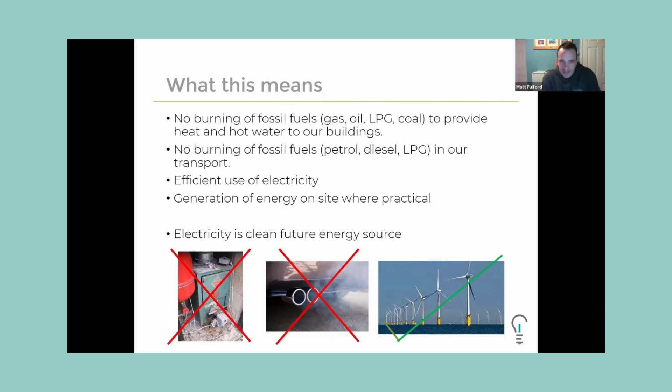So that's really what it means in your churches. I'd suggest you just have a quick breakout now, for no more than 5 minutes, on how this is likely to affect your church, and what's preventing you from not burning anything in a church? What's preventing you from achieving net zero? Because I'm really interested in hearing what you think might be the barriers.

So if it's possible, I don't know quite who I'm looking at, to drop back into those breakout rooms and discuss that for 5 minutes, that would be fantastic. Yeah, you're looking.

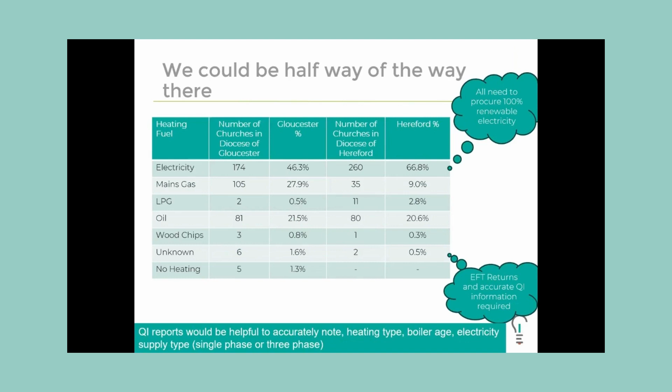So certainly there was a good discussion in the group that I was in around some of those barriers, in terms of sense of urgency, and people feeling bogged down by lots of things, which means that they're not taking action. And one thing I often see churches stuck in is going, well, look, this is just impossible. We can't do this. We're a grade 1 listed building. It's not for us, thanks. Maybe for new build homes, but for us, this is just too difficult.

So I really wanted to use this to try and bust some of that a little bit, and give a bit of hope and positivity. The first thing to say is that in terms of not burning fossil fuels, I think the church is already 50% of the way there. My evidence for that is studying all of the churches within 2 dioceses: Gloucester, no surprise, that's mine, and Hereford, which is often put out to be the most average diocese in the Church of England. Whether that's true or not, that's the claim they make.

So we've looked at all of those churches and how they are currently heated. Within Gloucester, just under 50% of churches are already heated by electricity. In Hereford, 2/3 are already heated by electricity. So they're already not burning anything. They're already using electrical solutions to heat their churches. And quite frankly, most of those churches have been using that for decades.

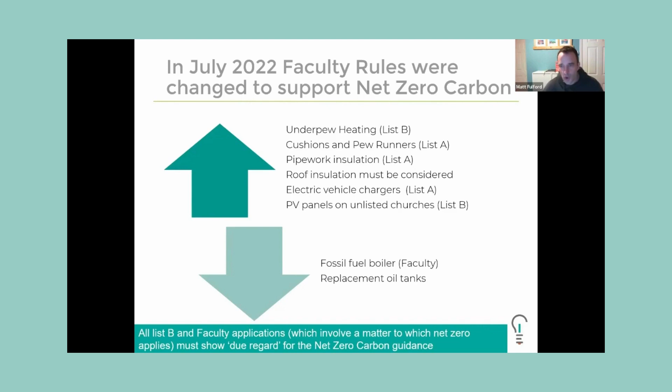So in terms of some of the answers maybe you did come up with in that breakout session, what this really means for churches is the replacement of gas and oil boilers is now very actively discouraged, and is only going to be permitted where no other options are available. It's not banned, but you've got to prove that you really can't do anything else.

Forms of electric heating, and we'll come on to lots of those in the case studies I've got, are going to need to be the future, but they're already with us. 50% of churches, as I say, are already there. And the faculty process for under pew heating has got easier to gain permission for.

So some of the challenges, I think, are firstly planning what to do before the boiler fails. A lot of churches I go to advise go, help, my boiler's broken down, what do I do? It's a bit late to ask that question once your boiler has failed. You need to be answering that before it's failed. So I often go around slightly scaring church wardens, apologies, and going, if your boiler is over 15 years old, expect that boiler to break down within the year.

I'm not saying it will, but if you expect it to do so, then you make the right plans around that. If your boiler is over 20 years old, expect it to fail next week. Now, if you go in with that mindset, that often creates some of this urgency of going, my boiler's 30 years old. Well, you're doing really well then, but it's not going to last you very much longer. It's probably going to fail next week. You might get a bit longer out of it. Who knows? But if you're expecting that, then that's what's happened.

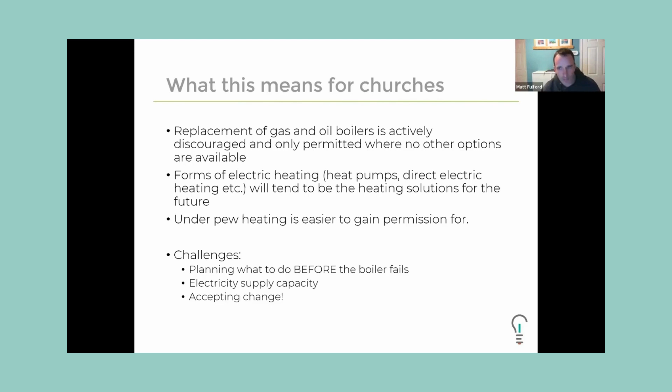Electricity supply, I saw that on some of the questions on the chat earlier. And can we get enough capacity in our building to do that? And I think the biggest challenge actually is accepting that there's a change. We need to do something different. Just because you've got a metal box somewhere down in a basement that provides heat doesn't mean that's the right way to carry on doing it going forward. So we need to accept that change.

Lots of technologies out there to do this, mainly heat pumps in lots of different forms. And I'm not going to go into a technical talk now on all the different forms of heat pumps, but just to say that my wife will lay testimony to the fact that I scream at the TV when the media mention heat pump as a single entity. It's not, it's many, many different things.

It's a bit like saying that all forms of transport are the same. And we know if we want to get from A to B, we can cycle, walk, get the train, the bus, fly in a helicopter, whatever. They've all got different attributes to them. It's the same with heat pumps. We have many, many different sorts, and we just need to choose the right one for the right place. Lots of forms of direct electric heating are also very valid in churches.

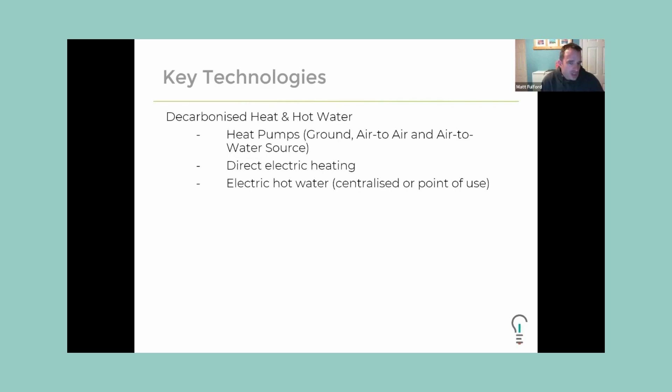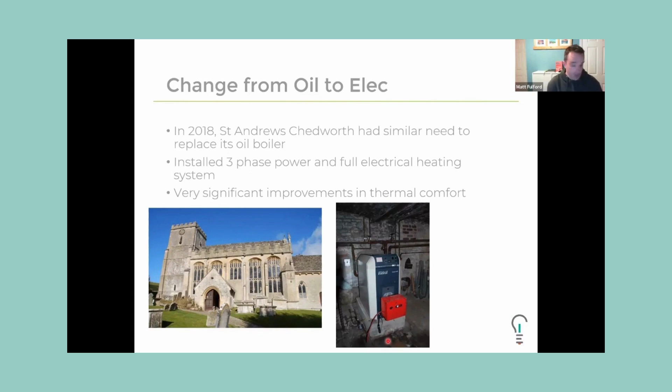Had to do something. So this church went ahead and installed a new 3-phase electricity connection, so it did increase its electricity capacity, and put in full electric heating, and had incredibly significant improvements in the quality of the heat within that space. So it went from being a church where you knew which pew you had to sit in if you wanted to be warm, we've all experienced those churches, to being a church where you walked in and went, oh, isn't this a nice, warm, welcoming space? Quite a fundamental change.

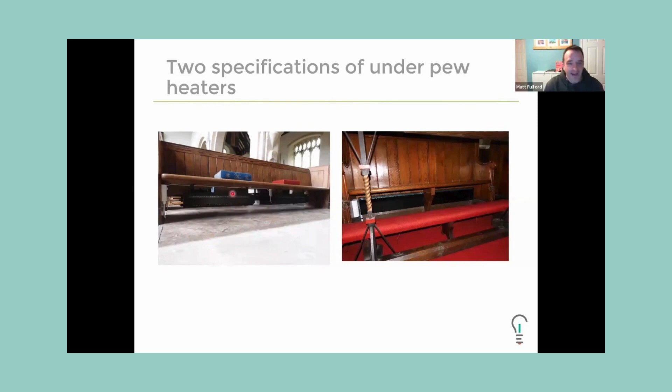It installed under pew heaters. These are two types. Look, it's my church. I installed two types of heaters because I wanted to be able to show people different types of heaters. Okay, so we've got one type underneath the pews, and another type up underneath the choir stalls. So you can see I've had to lie on the floor to take this photograph. When you walk in the church, you barely notice they're there, but you can see them in there. So that's what they've done moving forward.

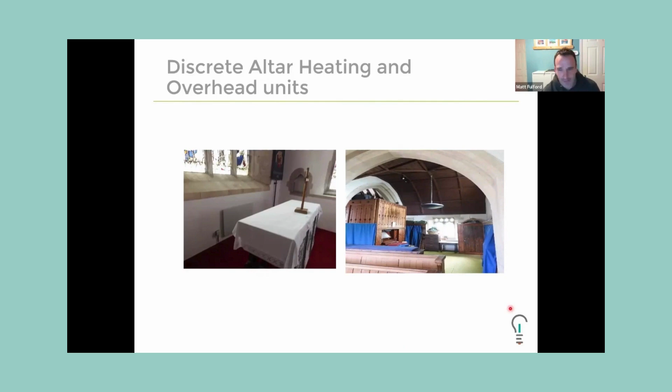It allowed the oil tank to be removed, so that's where the oil tank was. You can see it in position there, not looking particularly attractive against the Grade 1 listed building, and now it's gone.

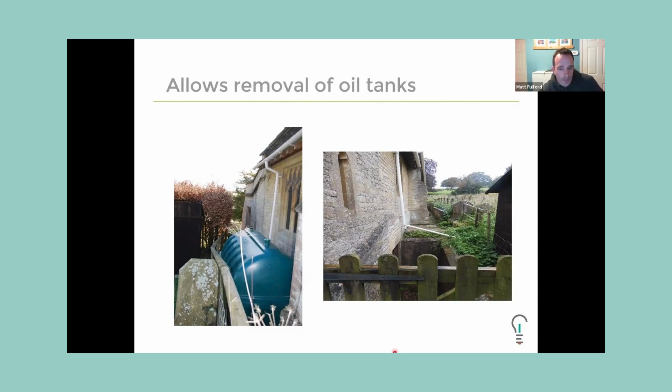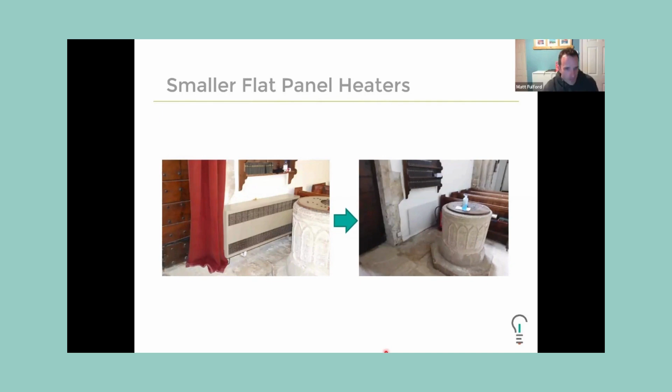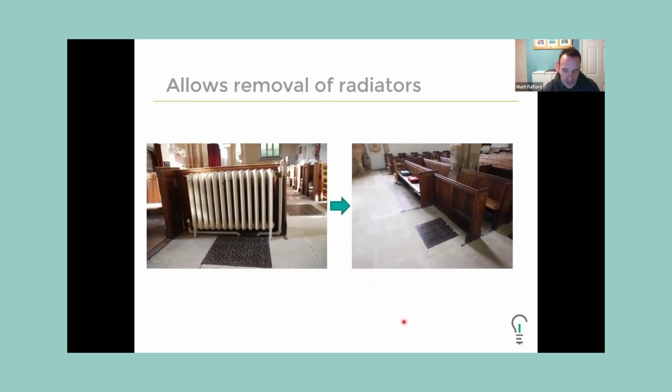It also allowed for - when we had big fan convectors that rattled and made noise and blew some warm air, if you were lucky, they've been taken out. In this case we replaced it with one very slim flat panel heater. You can see the architecture better, we can get around the font with more room, and it's now absolutely quiet. So there are improvements there. Other big radiators, big cast iron radiators, have now gone, so we're bringing back the ability to see some of the other furniture and features within that building.

Various lessons learnt in there. We found that these BN Thermic under pew heaters, the ones we used in the nave rather than in the choir, provide a bit more distributed heat, so we didn't get people complaining about a line of heat on the back of their legs, which we do with the ones up in the choir. We had a little challenge around the brackets needed to fix them, and we needed to get them a bit shorter, which the manufacturers now make. You really do need to heat the whole length of the pew - don't leave gaps between the heaters. This hit and miss approach some churches have gone with, where you put one heater in those pews and miss a row and then put it in the next pew, that doesn't work. You need to heat the length of every pew you want heated.

With programming, really keep it simple. We put in programmers - it wasn't that complicated - that you could time to turn the heaters on. We worked out you only need to turn them on 15 or 20 minutes beforehand. The easiest way to do that is to have a switch that the church warden turns on immediately after they turn on the light switch when they arrive to prepare for the service. That works best and it's the simplest.

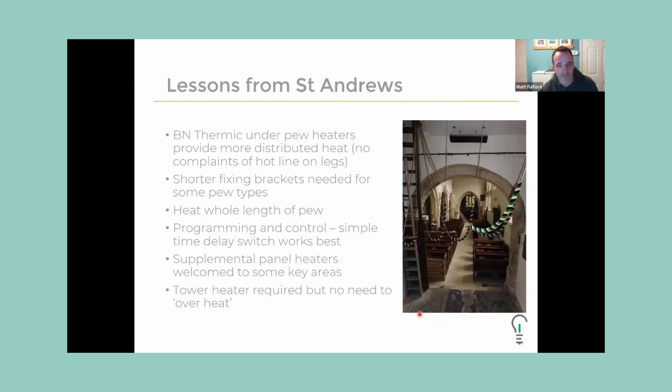So that was St Andrew's in Chedworth. One church, went from oil to electric under pew - huge benefits there, cheaper to run, it's great.

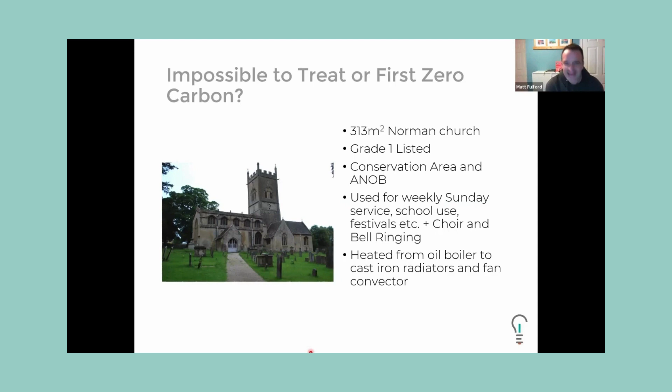This was St Michael's in Withington, also a church I know very well because 10 years ago I used to live in the village of Withington, and this at the time was my local parish church at which we worshipped, and both of my children were baptised. So it's everything that's sort of going against you in terms of wanting to do big projects - it's Grade 1 listed, conservation area, area of outstanding natural beauty. It was again heated from oil into cast iron radiators, very similar to what we've seen at St Andrew's.

In 2010, this was a church that set out to be net zero carbon. At the time, really interestingly, we did lots of energy efficiency things, changing the lighting for LEDs, which weren't as common back in 2010 - they are now. And from a heating point of view, we put in a biomass boiler, which was quite interesting. So we took out the oil boiler and put in a biomass boiler. Biomass boilers are big - we only just about managed to squeeze it into that space. It replaced the oil boiler and it worked fine, but it didn't improve the heating in the church whatsoever.

We still had the same radiators. If you happened to be seated close to one, that was great. If you didn't, you were pretty cold. It warmed up in pretty much the same amount of time as the previous oil boiler took - it didn't really change the heating within the church. And this biomass boiler needed to have its pellets loaded into it. It was only being used for 8 hours a week, so it didn't need very many pellets. The easiest way to do that was to get bags of pellets and load them by hand into a big hopper that sits just behind that black unit there.

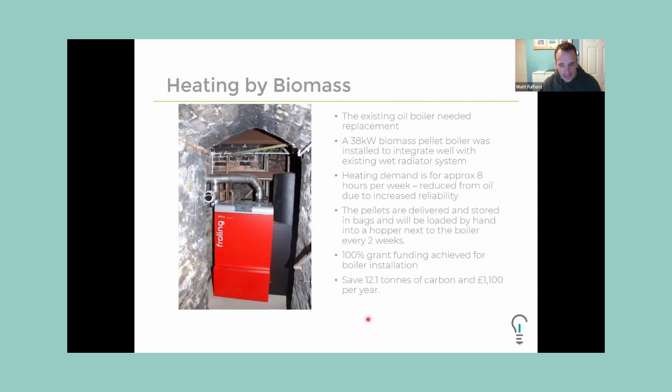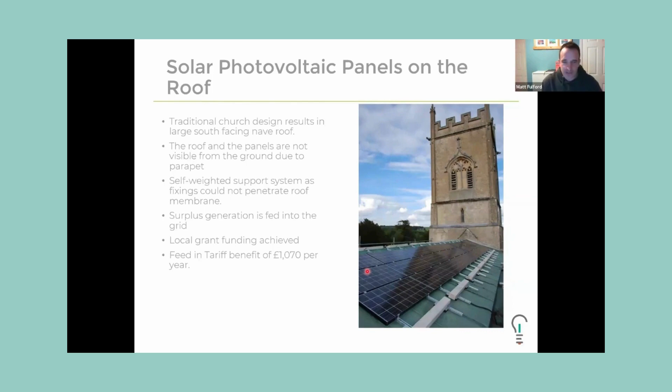After 10 years, interestingly, things did change at this church. But what we also did at this church was put solar panels onto the roof - they don't penetrate, there are no fixings in there. This was one of the first churches in the country to put solar panels on, shortly after St James's Piccadilly in London. Now they're fairly commonplace, and I think we've pretty much learned how to do fixings on heritage structures with those solar panels.

So I mentioned after about 10 years, things did change a little bit with this church. The lighting worked perfectly.

PV has been brilliant, pretty much maintenance free, and actually is one of the biggest income generators for the church, because it benefits from the feed-in tariffs, which unfortunately are no longer with us.

But the biomass boiler wasn't really a great success. There were lots of small problems that occurred, normally with getting the pellets from the hopper to the boiler through the pellet feed system. It often just got a little bit of a blockage and needed someone to go down there and wobble a hose or tidy a bit of dust out. And we needed people to load this boiler by hand, and there were less and less people willing or physically able to do that.

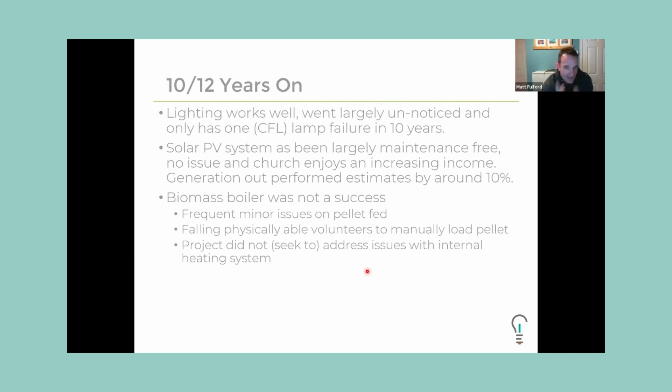Nothing changed with the heating inside the church. It was still behaving the same way it was with an oil boiler, and that had its issues. So in 2019, this church went, well, we still want to be net zero carbon, and have now stopped using the biomass boiler and installed electric under pew heating under all of its pews. It's really interesting to see the journey that church has gone on with its net zero carbon journey. It got there with biomass, then decided biomass really wasn't working for them, and now they're going electric under pew. They are very happy with that.

So those are two churches that you may have ones familiar and similar to.

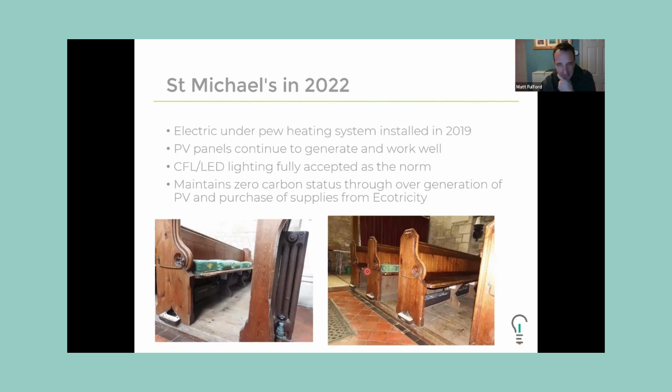Next church is a very recent convert to zero carbon solutions, and this is St Matthew's Church in Bristol, and they were the first church to trial what is now becoming quite well known, the Herschel Halo heater, which is an infrared heating unit.

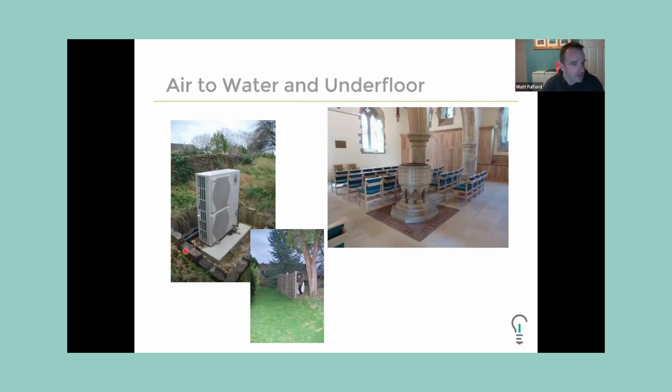So it's not a particularly happy case, but an interesting one to learn from: if we get that balance wrong between how the church is used and its heating system, it can go very badly wrong and affect everything, including the mission of the church, which is obviously not what we want in a negative way. The final church I'll mention is a beautiful little church down in Dartmouth, St Petrock's.

I threw this one in because you've got different types of churches - festival and community churches - and this is really at that end of the spectrum. It's a tiny little church right out on the peninsula of the Dart River, as it flows out of the country, and it's actually in the grounds of an English Heritage castle. This church is used massively in the summer when there are lots of visitors, very tourist area - it's open with lots of events going on. But in the winter it's hardly used at all. So this is really a seasonal church, it has its season.

Interestingly, the church here uses it for a Book of Common Prayer evensong about once a fortnight, and it's really well attended. They also have a really well attended carol concert there. They have a tiny electrical supply - most of the lighting is done by candlelight, and actually the biggest carbon footprint is the paraffin used in those refillable candles. They have only four little electric panel heaters dotted in each corner. This church is never warm, but it's really popular. In discussing that, it's like - well, it's not used very often in winter, so we don't really need to heat it. And the times it is heated, it's quite interesting.